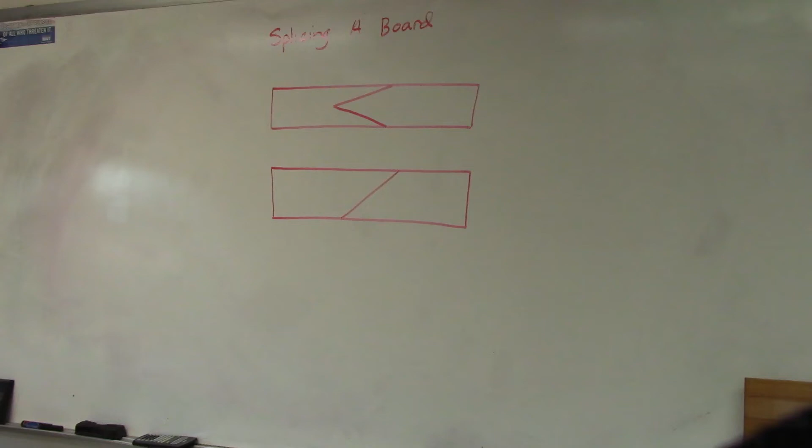Okay, in this video I'm going to explain to you how you can lengthen a board. There is no way to stretch the board, so there has to be a way of lengthening the board, because sometimes you need a board that's longer than what you can get a hold of.

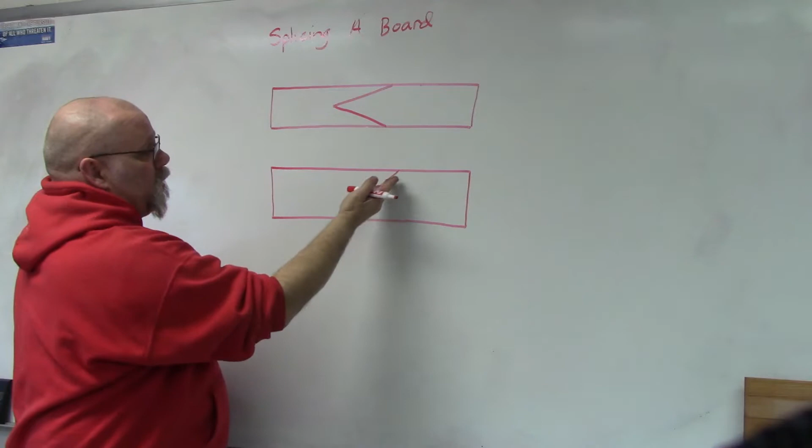So there are two ways to extend the length of a board. Number one would be a splice, where you cut this V notch in here, and the other method would be where you cut the board at a diagonal, and then you'd put a sheet of plywood on here and staple and glue it to make the board longer.

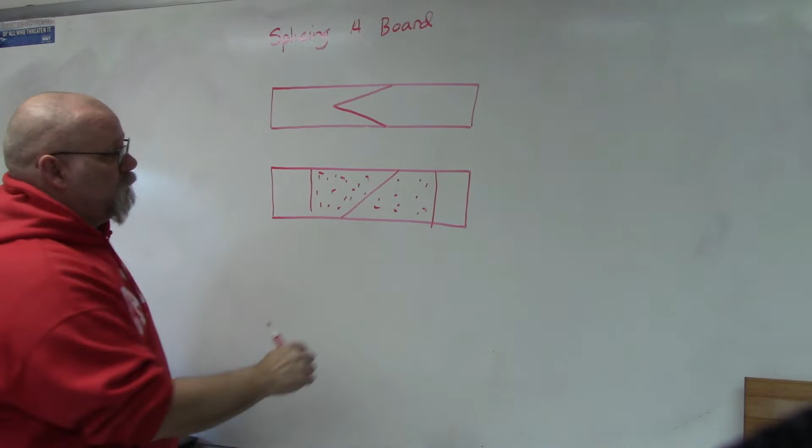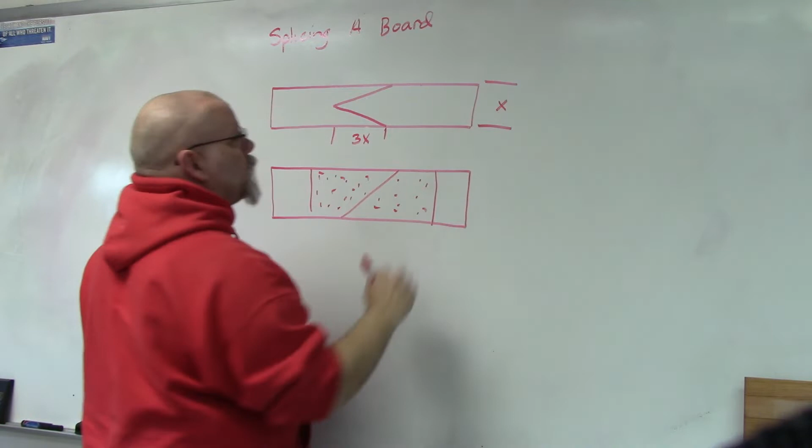So how long do these cuts have to be? The length of these cuts is usually 3 times the width of the board. So whatever the width of the board is, this cut would be 3 times that length. So if you're working with a 2x6, you've got 6 inches wide, so this would be 18 inches from here to here. So you have to go 18 inches deep.

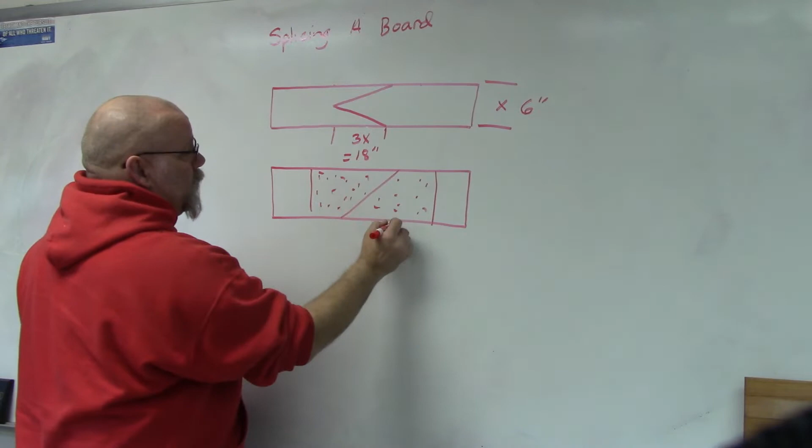And the same thing here. This angled cut needs to be 3 times the width of this board. So if you're working with a 6-inch board, then this would have to be 18 inches from this point here to right there. It would have to be 3 times that length.

And then the plywood, you should have at least a foot of plywood past each end. So if it's 18 inches, then you have to add 2 feet to that. So 18 plus 24 would be 42 inches for the plywood. And you want to make sure it doesn't go anywhere, so put some

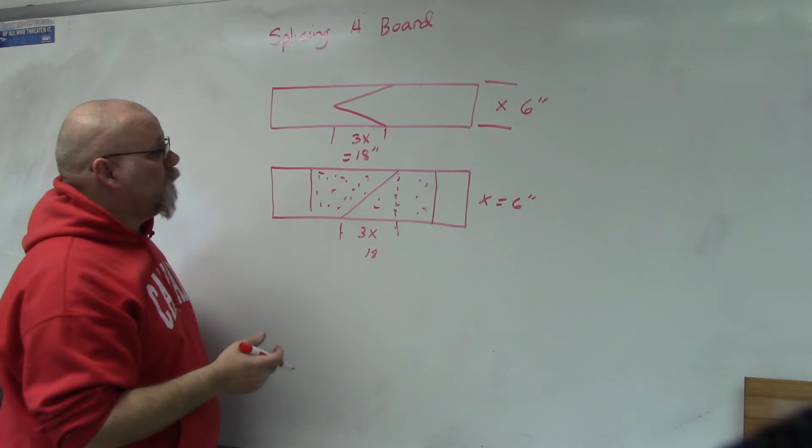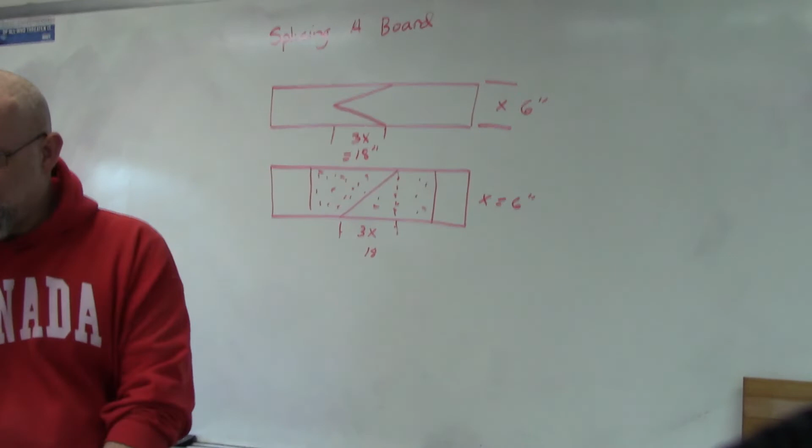liquid nail on there. Use 1/2 inch OSB to cut it, and then staple it with either a 1/4 inch crown, or if you have 7/16 crown, whatever, you would just staple it or nail it, whichever you have available.

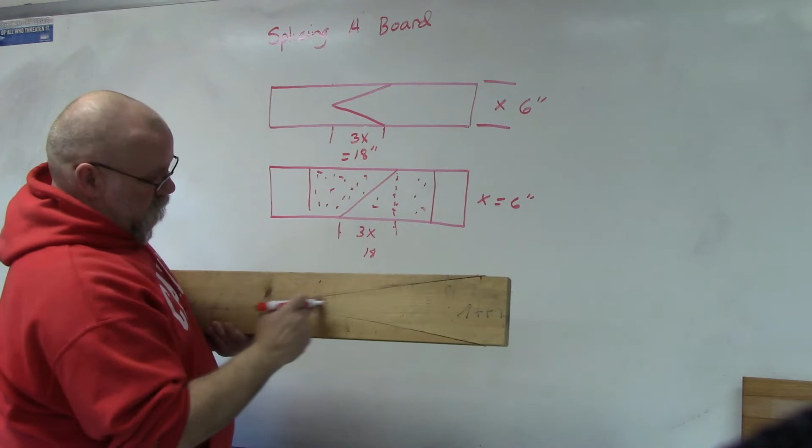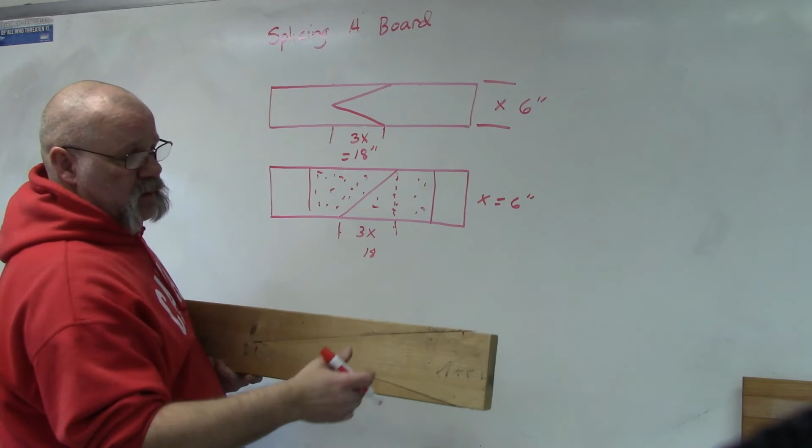So here's an example of a splice. You can see where the splice goes from this point right here to this point right here. This is a 2x6, so this distance would be 18 inches. You have to cut this V notch so that this board fits in here nice and snug, and then from the side, you nail it through the side. Again, you want to put some liquid nail in there on both sides before you shove it in, so you get a nice solid splice.

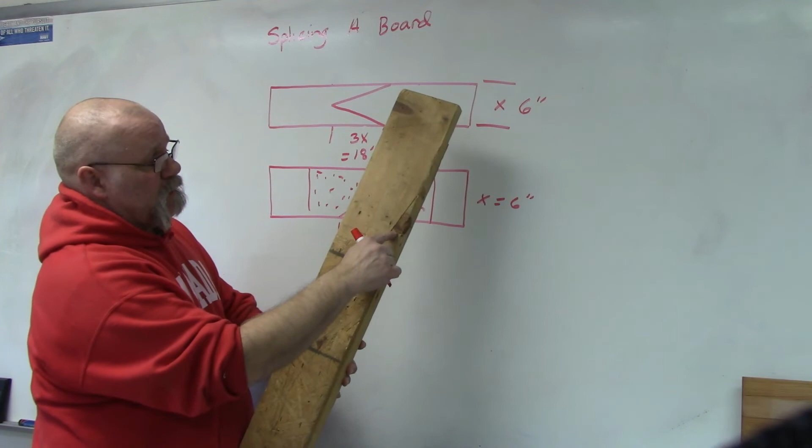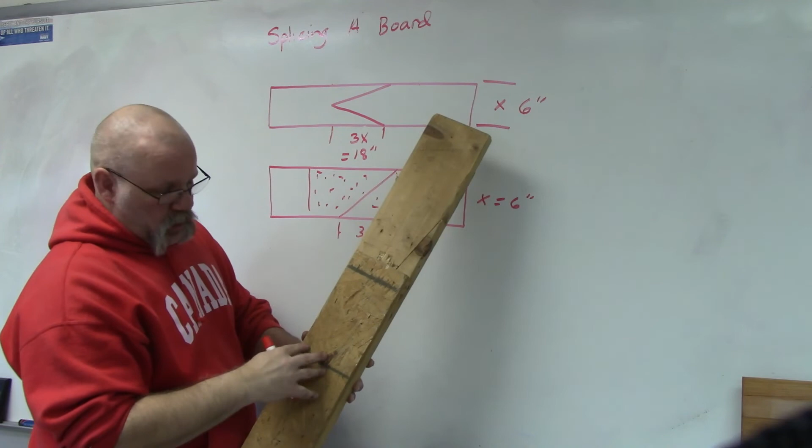The other method, I cut this a little short so you can see, but the OSB is nailed on over the top, and if this was real length, then it would be up here, and then liquid nail and staple the OSB on, because here you can see where the other end of the splice is right here, and you can do one side or both.

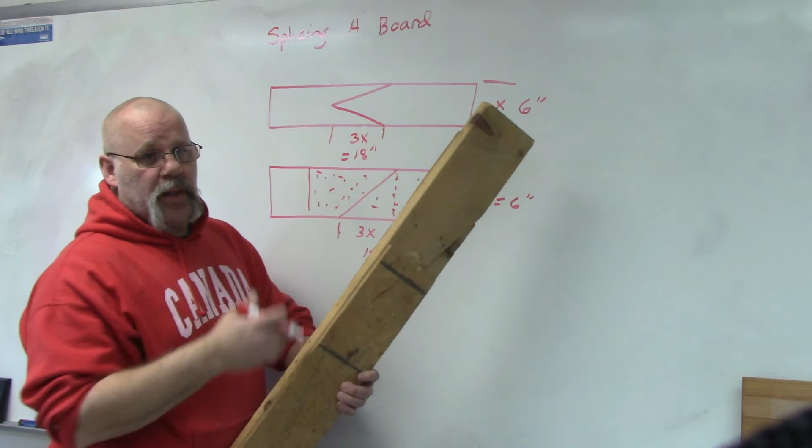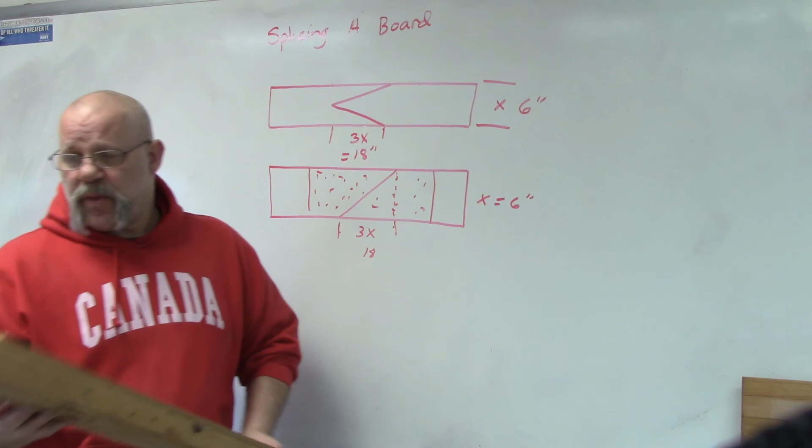I mean, if it's on the gable end, you can only do it on one side, but if it's on any other rafter, you could actually do it on both sides to reinforce it. So those are 2 different methods for extending the length of a board. Okay, all right.